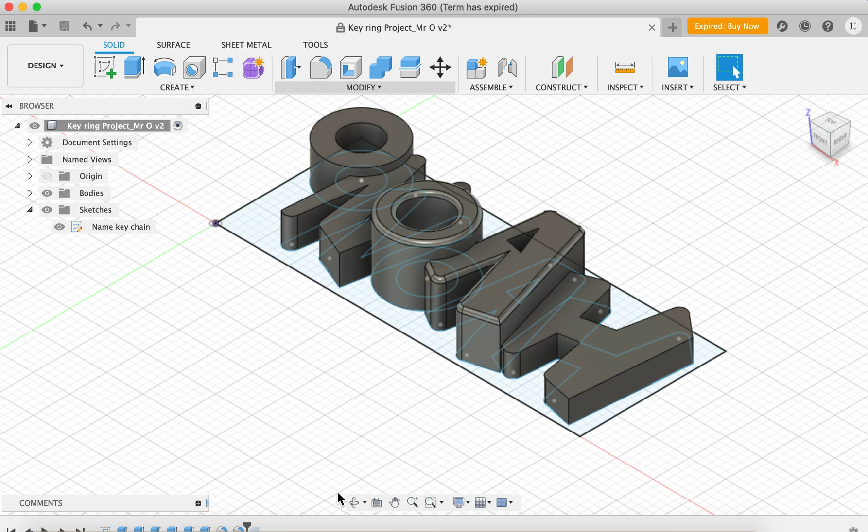All right, here we go. Hop into Fusion 360. You should have your name tag or keychain finished, and you've got your bodies. It looks something like this. And remember, I showed you how to 3D print it as well.

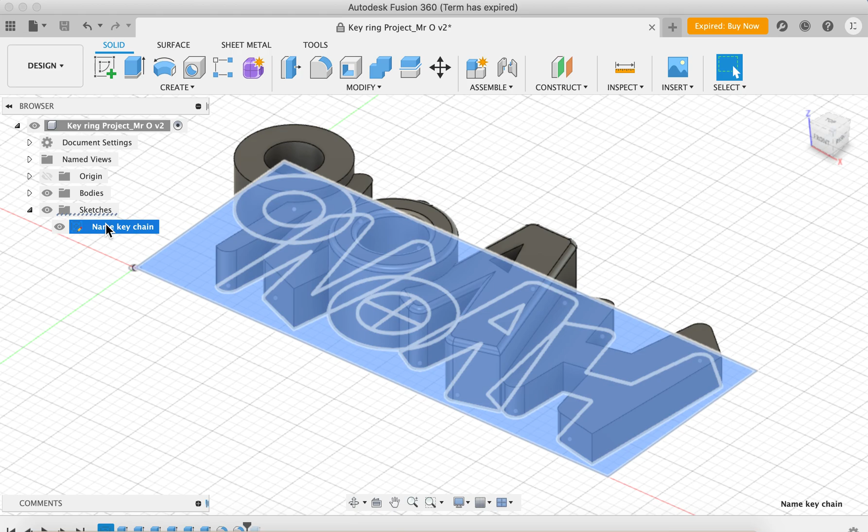Something important: if you haven't done this already, you should only have one sketch, maybe two for the outside, but really you only need one sketch. If you don't have one sketch, you may need to start again and retry to create the new sketch. Okay, so here we go. This is what we're going to do.

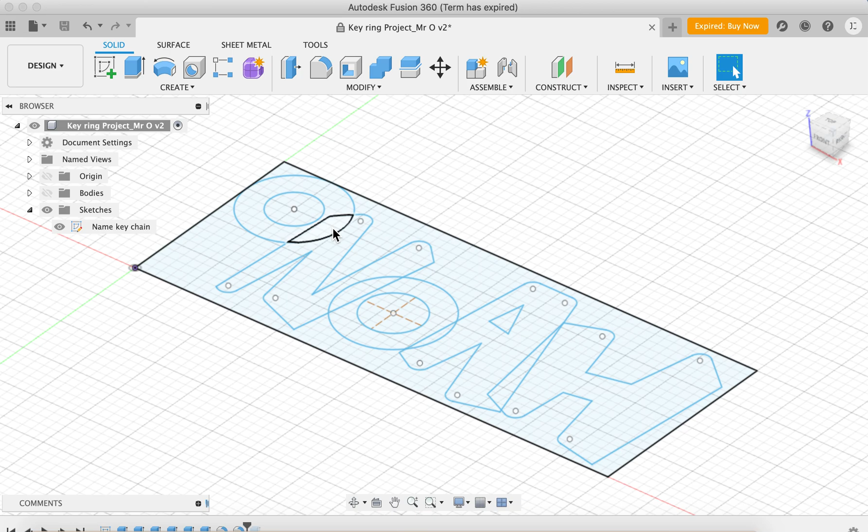We'll start off by getting rid of our bodies because we don't need this. And now we're going to clean up these edges. If you can imagine, the problem is that there are these things that overlapped. So if I were to cut out every single line, I'm going to have a shape that looks like this, then another shape like this, and another, and this one, and that one.

So that's a problem because it's not going to be one solid unit. It's going to be all of these different shapes. So what I need to do is clean up my sketch so that it's one solid shape. The way to do that is I need to edit the sketch.

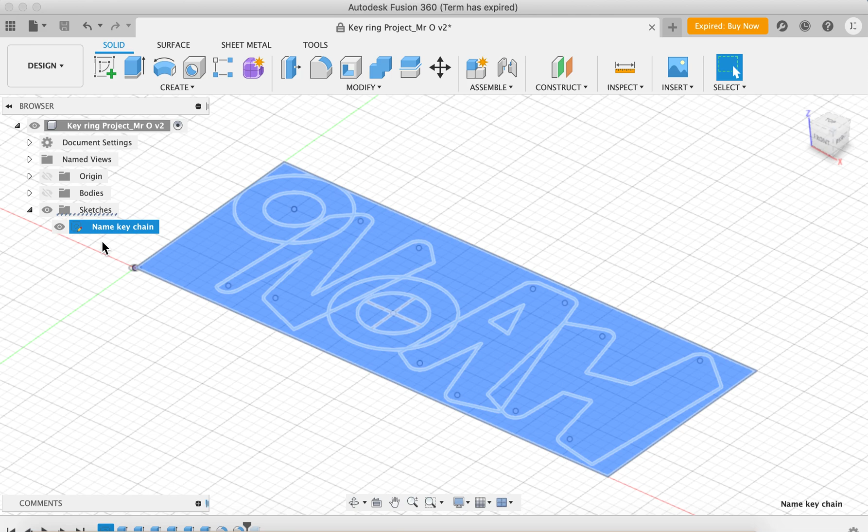I could either right-click over here and go to Edit Sketch, or I can right-click on the actual sketch here and again edit sketch. So it zooms around and now I'm in edit sketch mode. You see it's changed into sketch mode, and the tools have changed. Up here I'm mainly going to be using these modify tools. The most important tool is probably this trim tool. You can use extend as well, but the most important is the trim tool.

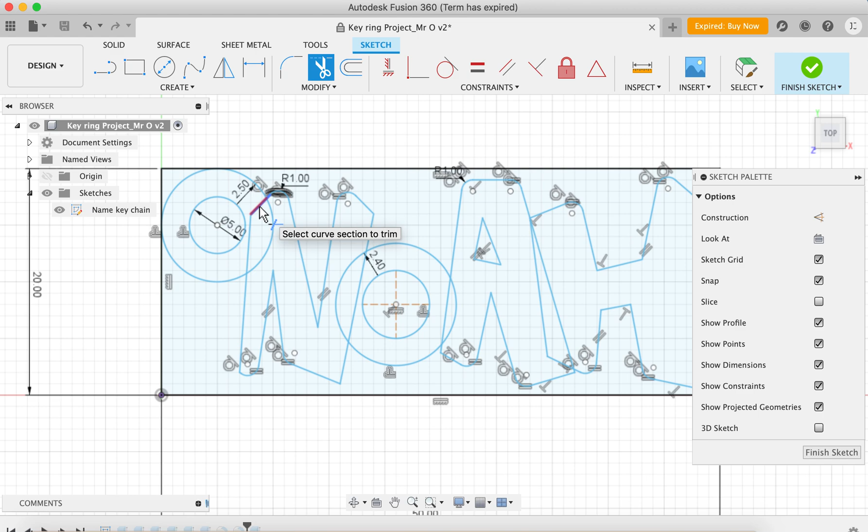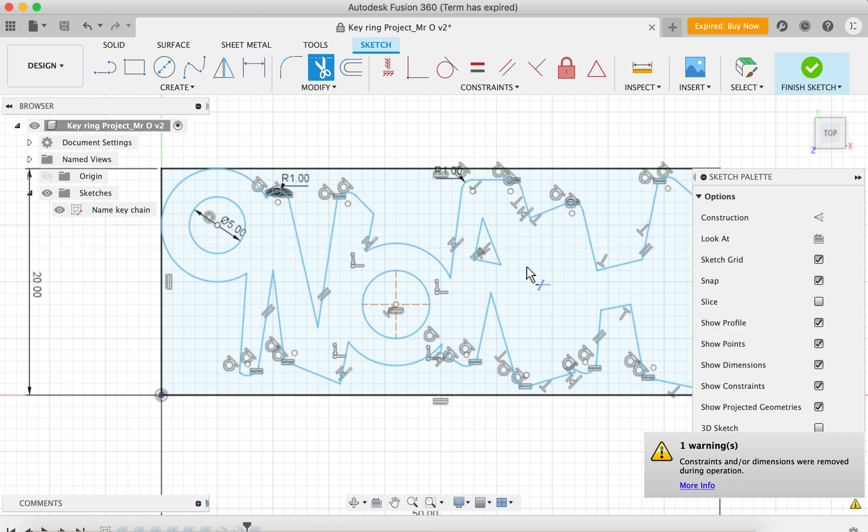So I can go in and see how it's highlighting the red spots. I can just click on those red spots, and now I'm trimming my lines so that I can clean them all up. I'm trying to make one big solid sketch. I'll just go through mainly those connecting points where the words are connected. So that's actually already done.

Then I can also use the select button. See these kind of lines here, I don't want these either, so I can go in and click those just to remove them. See now, rather than having those little small pieces, I've got one solid piece.

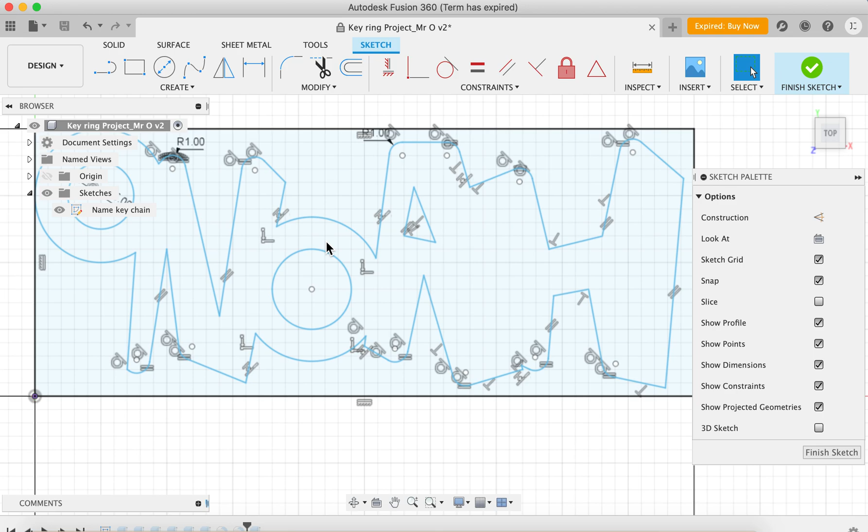Okay, so then I can finish my sketch. Takes a little while. So the sketch is finished, and now you can see how it's one big piece. There's no more of those two pieces. I've got one big piece here.

Okay, pay attention if you want to. A couple of weak points that I already know is that this could possibly break when it's laser cut, so I could go back and change that. Same with this little spot here, or maybe even over here too. Just pay attention to those. If you want, you can go back and modify those again.

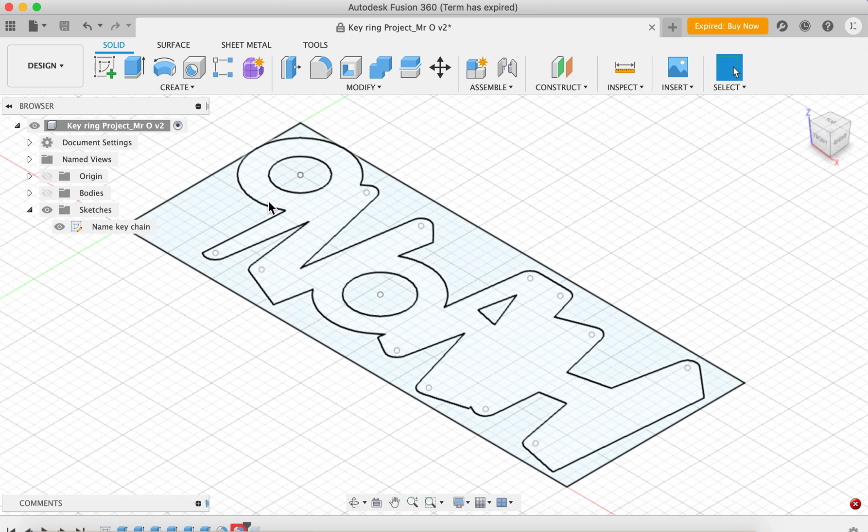Okay, so now that I've got this all cleaned up, the next step is back over here on this word, right-click again, or hold down control and click, and then where it says Save as DXF, I'm going to save as DXF. So this should pop up, letting me save this. I'm going to name it Mr. Ortwein keychain, something memorable, and save it.

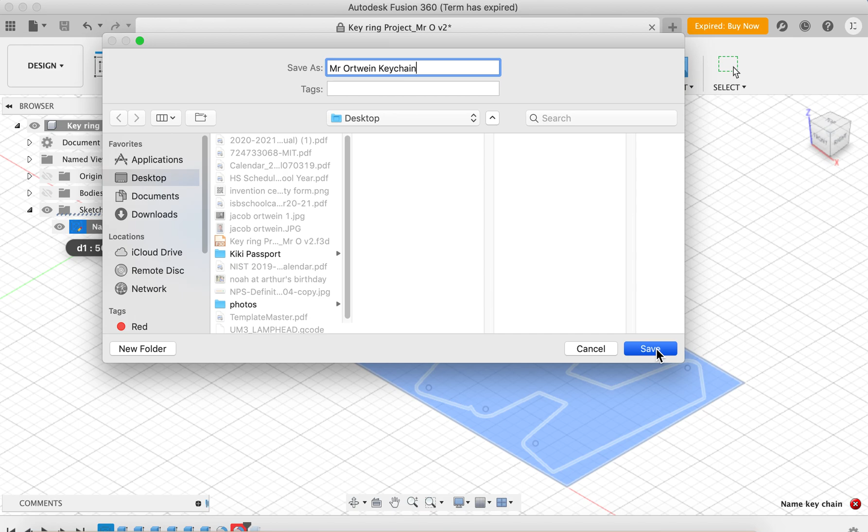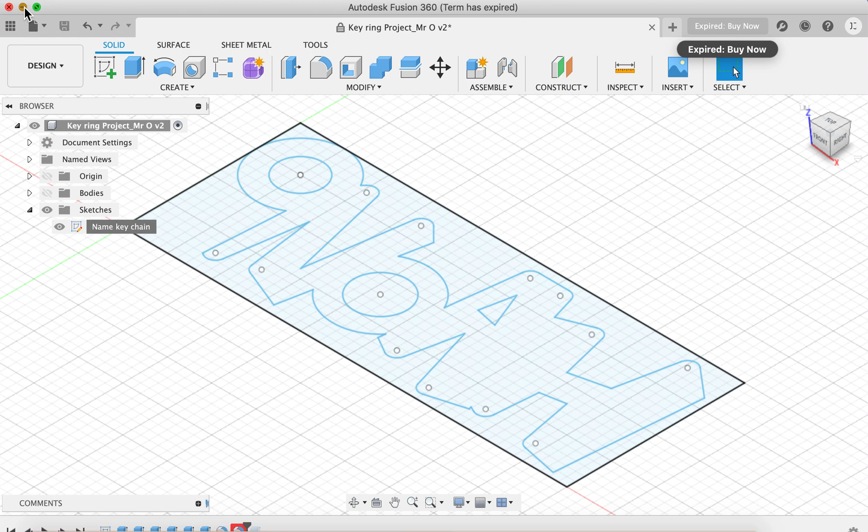So it should be saved onto my desktop now. It depends on which class you are in or where your folder is, but the next thing is you need to take that DXF file. For me, I'll click where it says put DXF files here, move this out of the way, and then take my DXF file. Some of you may have done this already, but just to make sure we're doing it together, I'm going to drag my DXF file and drop it inside here.

So instead of waiting for it to load, I'm just going to head back and recap quick. Remember, the goal is to prepare your sketch for laser cutting. That's cleaning up the sketch a little bit using the modify tools, and saving as a DXF. Okay, so that's it for now. Then after that, we laser cut. So talk soon.